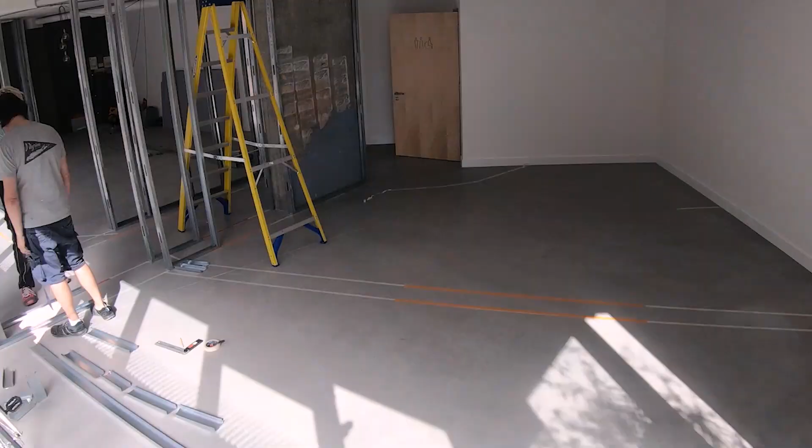How you doing? You Paul? Yes, nice to meet you, Paul. Claudio, nice to meet you. What's your name again? Scott. Welcome in, I'm gonna show you what I'm doing here.

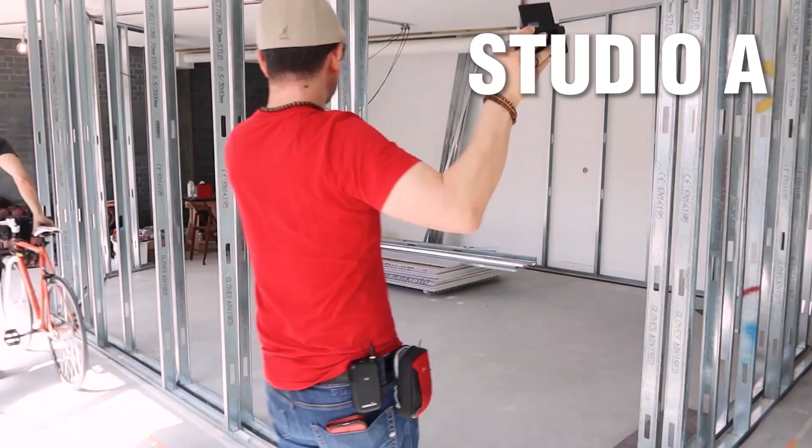This is my main room, where I'm gonna put all the synthesizers and all the production. Double walls, insulation material in here, then a 3 centimeter gap and more insulation here. And I'm also using this rubber in order to have it somewhat isolated. We're also doing the same on the top ceiling.

For the back, for now we've just planned to do one wall. This is the separation wall to the other unit, which has sound block. This would be enough, possibly? Well, it depends on how many layers of plasterboard you're putting in there, what sort of absorption you're putting in.

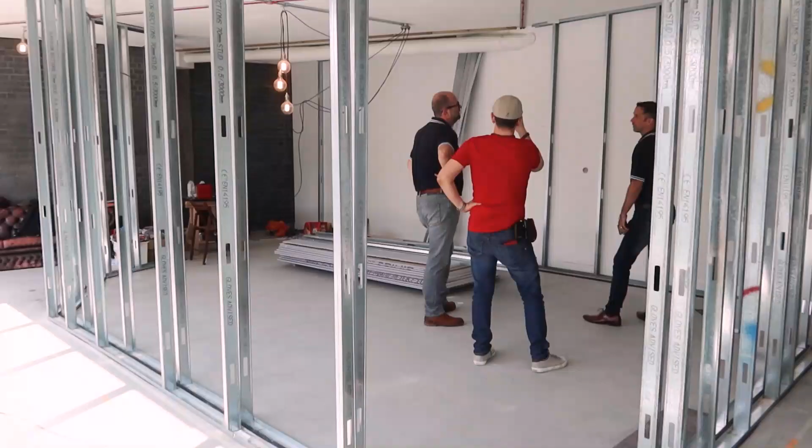What would you suggest that I use here? Some kind of mineral wool, some kind of rock wool. It depends what sort of noise level you're generating here and what people next door are expecting. Yeah, I'm trying just to be as quiet as possible for them. I don't want to disturb them, but mainly, I don't want to be disturbed.

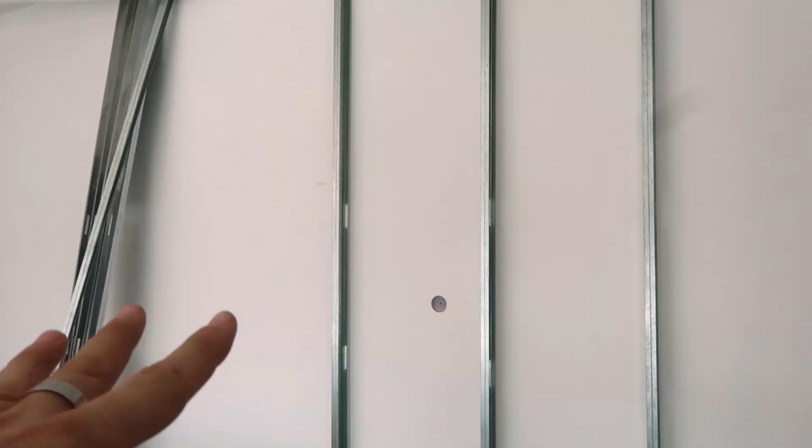Would you suggest that I should put double walls there? You would? Because you can't put it in afterwards. Alright, so then sound block, two of them? That would do? I think if you put resilient plasterboard bars or resilient fixings or something. Resilient fixings, yeah.

That floor slab will go into your neighbours, so they'll be sitting on the same floor slab as you. So what is a reasonable way to have a floating floor? Maybe some rubber? We have a panel that sits on anti-vibration mounts. But in this instance, it will make it too high, then your ceiling comes down. You can get rubber and timber floors that are quite shallow, maybe 50, 60 mil, something like that. So the whole floor is then isolated off this slab, which I think you should look at doing.

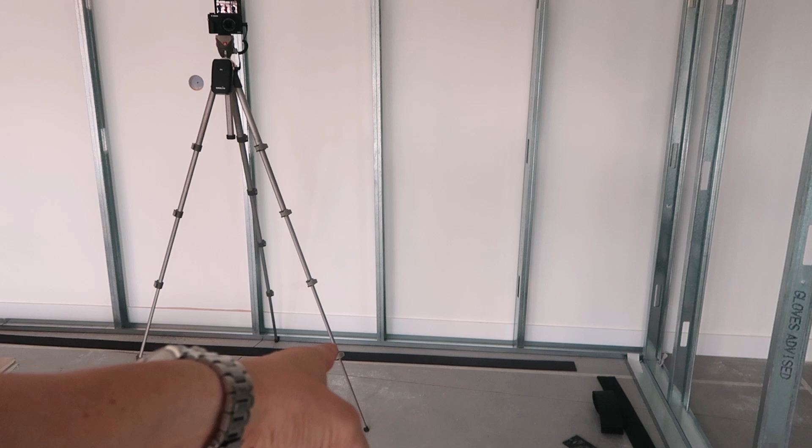So neoprene, of what thickness? 10 mil, something like that. Slightly thicker than that 5 mil one. So rubber and then floorboard. I think you want it quite thick so it's not too flexible, and you might have to build it up, so it might be a few layers of ply on top of your rubber.

When you say ply, like this one? Yeah, something very stiff. We've made up floors for audiology rooms with rubber, ply, different materials. Rubber, ply and flooring, basically. Sometimes steel plates in there. That would be expensive, right? Don't think it'd be expensive. But doesn't metal transmit the sound even more? No, as long as you isolate it, no.

It's good for mass damping. So yeah, it's good to stop. Because you stop sound with mass, correct? Correct, low frequency sound particularly, yeah. But yeah, you don't want to be in here doing something and vibrations transmitting out through your floors.

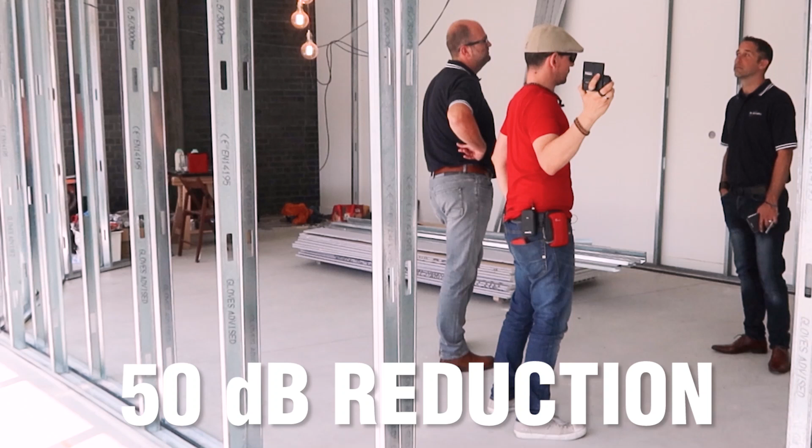And for the ceiling, I mean that's a concrete slab, isn't it? It's going to be 150, 200 mil thick, and I think you get around about 50 dB reduction through something like that. You've already got a good concrete slab. You're not going to add a great deal of noise reduction, because in order to increase your noise reduction, you need to double the mass. So you're never going to double the mass of a concrete ceiling by introducing timber and all sorts of other things. You need to create some absorption in the void between your finished ceiling and your concrete slab.

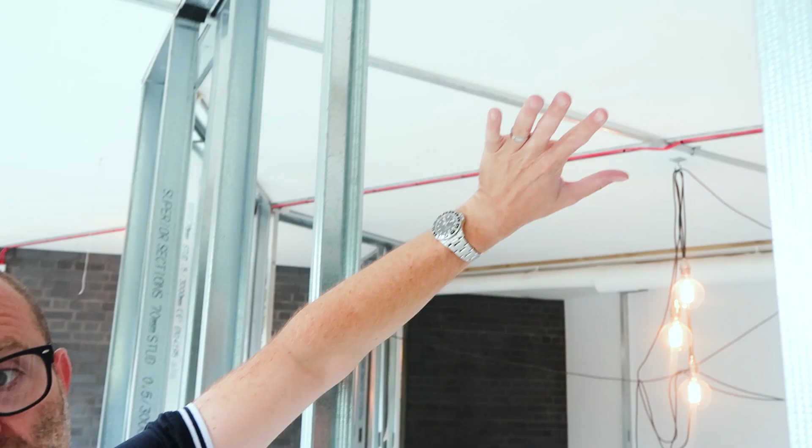So again, you might want to put rock wool or something similar up there. So rock wool and plasterboard. And in order to hang it, I need some kind of isolation. Yeah, again, resilient type hangers up there. Get some absorption up there, get a little bit of noise reduction, plasterboard or something similar. But you're not going to add a great deal to what you're already getting in terms of noise reduction through that, because there's a big slab of concrete.

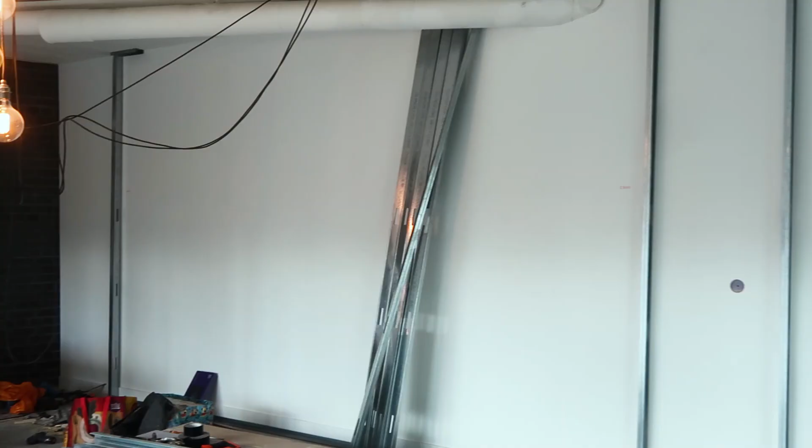Big slab there, yeah. Quite a big area to cover here, so yeah, it could end up being a bit expensive. Yeah, I know.

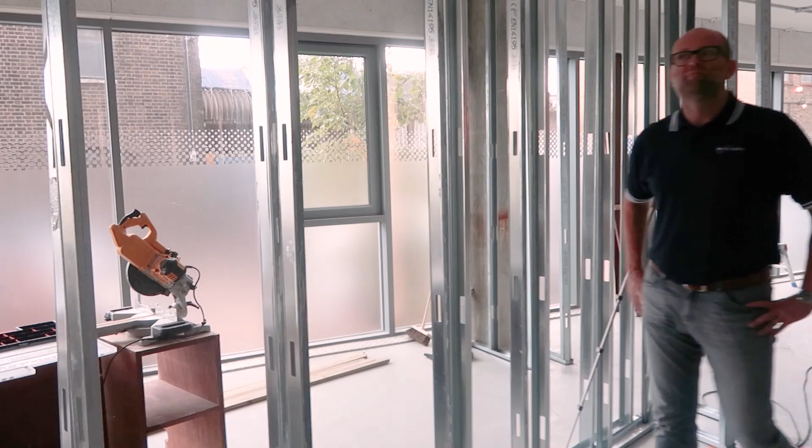Then this will be the mixing room with slanted walls so that the sound doesn't bounce too much. Yeah, you don't want any standing waves or any bouncing back and forth. Oh yeah, good. What's in there? Just a toilet? Yeah, that's a toilet, but this is another business unit.

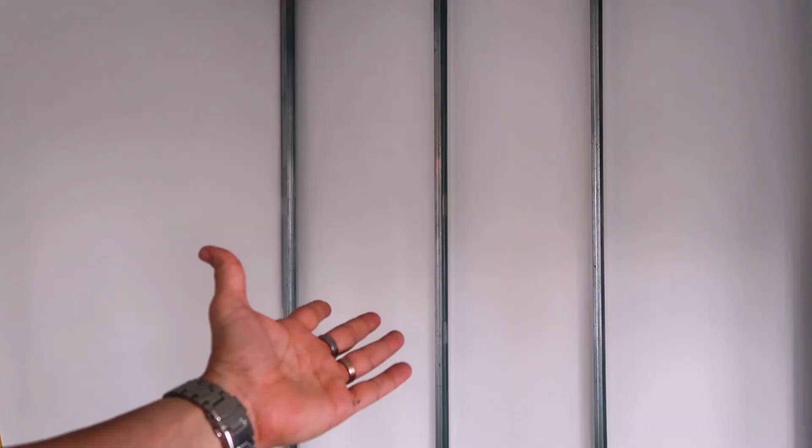Yeah, I think you need to protect yourself because you don't want to upset your neighbours. So double walls even here? Definitely, yeah? Well, if it's going into the neighbours, just protect yourself. If you don't do it, it's not good enough, and it's harder to do it afterwards. I mean, plus we're talking about like 10 centimeters more, may as well do it, right? Yeah, just so less risk of having a neighbour complain.

I don't want anyone to complain ever again. You have to understand I spent my whole life being told, Claudio, turn it down! This is the one time where I can make that disappear.

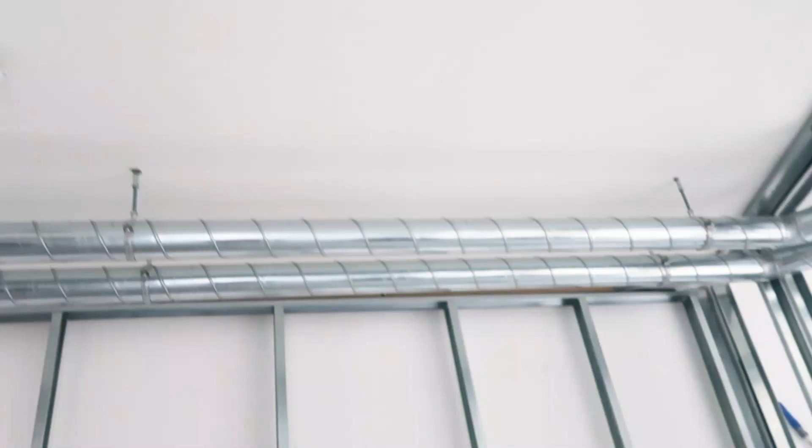What are these? These are ventilation for my bathroom. I don't know how it's gonna work because in the end I'm having ducts for the air conditioning, but I'm trying to save as much room as possible for the ceiling. Lastly, this room, I won't be able to insulate too much because I've got this. The sound is gonna go out from this. There's nothing I can do about it.

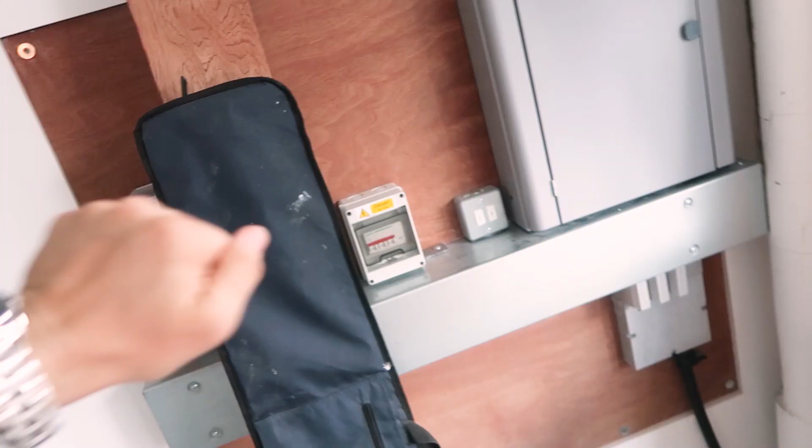In this corner, a door here, because of course I want to be able to operate the power, the servers, all the noisy bits, separated, are they giving silent? Are they giving you a noise level inside? Are they saying to you we're going to deliver the air at a certain... What I know is that if you use soundproof conduits, the ones that have like that rock wool inside of it, it's super quiet.

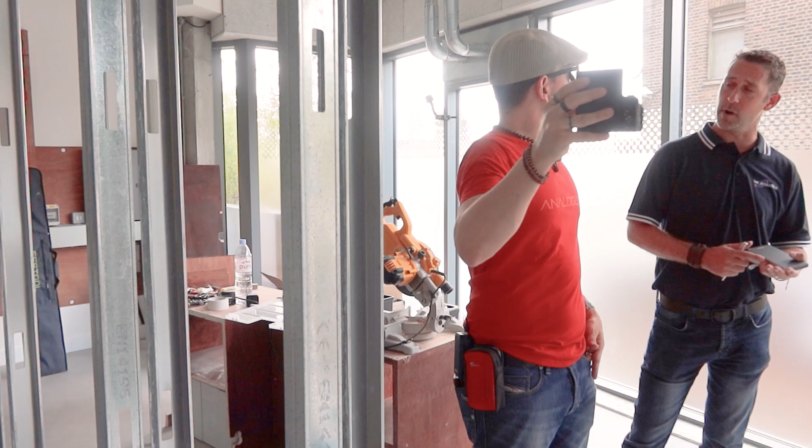Tell me about doors. We're going to offer you the latest model, which has just been through a fire test achieving 90 minutes integrity and 60 minutes insulation. Insulation wasn't critical in the UK before, it's more of a European thing. But since legislation in November, to provide an external fire-rated door it has to be tested to EN 1634, which the majority of doors produced in the UK don't have to meet—it was BS standard before. So we've developed a brand new door to take that part of the market and also upgrade our existing door, which is a 40-50 year old design that works brilliantly, but it doesn't mean we can't evolve it even more.

So are you saying I'm going to get your latest model of doors for my studio? You will get the very first doors that we produce.

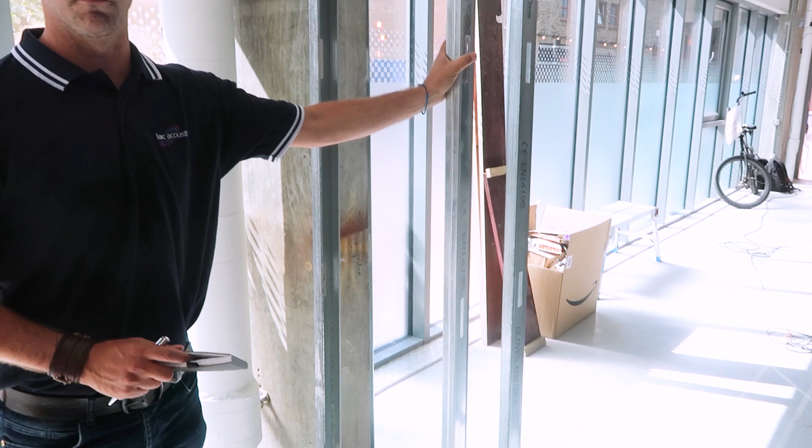These are quite heavy doors, about 200 kg each, which is why it's important to support them correctly. Is this going to be enough or not? No, for these doors and any high acoustic steel doors around that weight, you need a nice bit of timber construction—a rugby goalpost, H-frame construction, probably 100mm thick to be safe. We need to do it to the size they were detailed to for fire and acoustic purposes, which is why we're having this conversation now before I make these walls permanent.

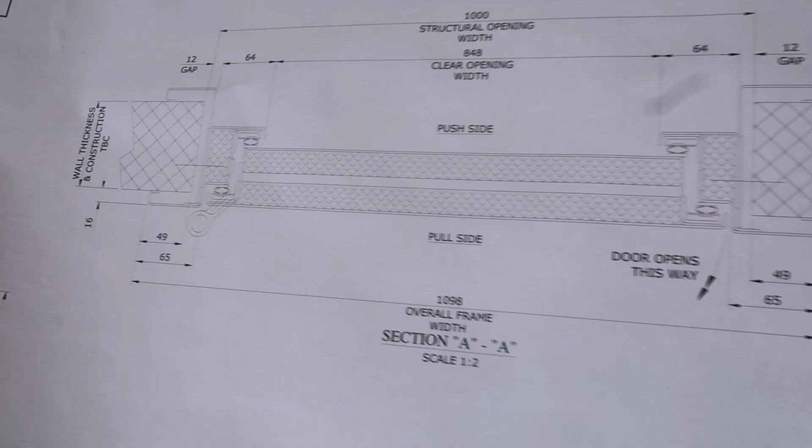So it's going to look very similar to this—you'll have your vision panel, the lock more centralised, the vision panel, and the closer to make sure it closes behind you and latches, which we have to have on the fire rated door as well. But these hinges are disappearing—we're now going to concealed hinges. It's not something anyone else, as far as we know, does on a door of our performance. Concealed hinges so you won't see them, and it'll work just as well. Drop down seals, and we'll still keep the two mag seals in that door—that will remain the same.

And what is the finish on these doors? Polyester powder coated, so it can be any colour you need it to be—entirely up to you. I'm undecided, but I like combinations of red, wood and white, I think that should be the theme. We could do the frame one colour and the leaf another, if you like whites and reds, or the whole thing red, either way, it's not a problem. So, red doors—something for you to think about.

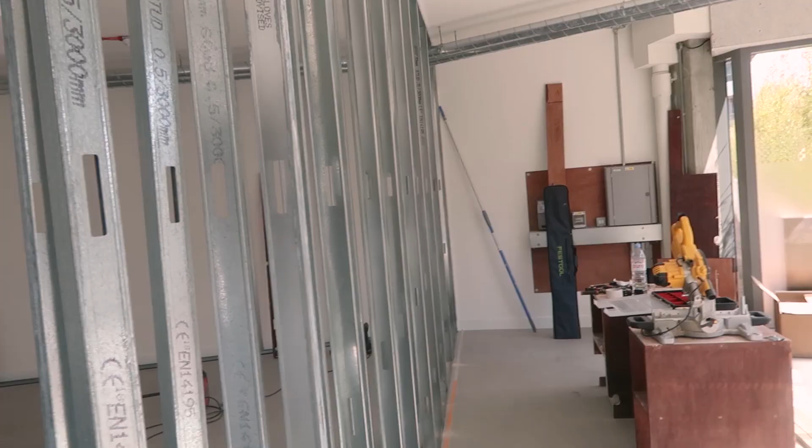So basically, one door would be here, one there, one there, and one in the back for the noise room. But that one won't have a vision panel because... No, I don't need it. No, exactly. This is so exciting!

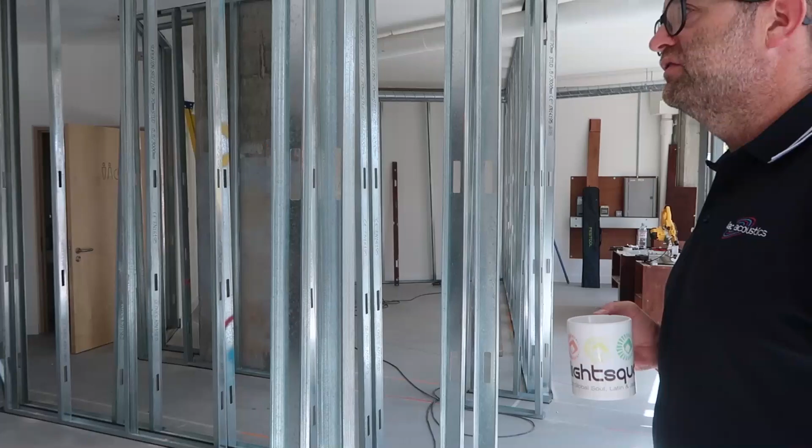I'm thinking of making some nice big windows here, another window between the two studios so we can see through, and also it makes the place look bigger. Yeah, so it's going to be minimum 200, say 250, 260—a very good wall in terms of noise reduction. So you want to match that window? Yeah, and what do I have to do in order to match the window?

Acoustics are based on the air gap between the two panes of glass and the thickness of glass. If you've got a wider wall, you don't need as thick glass, but if you've got a thinner wall, you need thicker glass to work the same way. I'll go away and look at our calculator and the thickness of the wall, and what thickness of glass we'll need to create a window with a performance of probably 55, 60 dB. Would you say two windows or one big window?

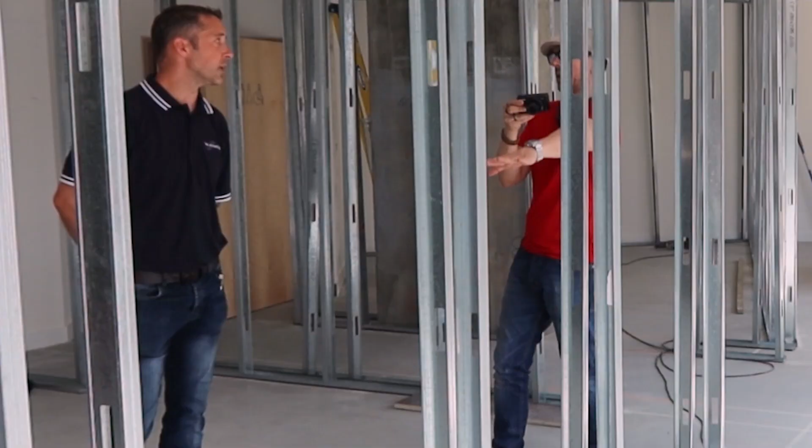What would you suggest? Aesthetically, I think one biggish window would look better than a couple of windows. That means a stronger structure in here to sustain it—your builders will need to put in something that's going to take it. If we do, say 2 metres by a metre, I don't think we'll need to go too thick on the glass either to achieve that.

10.8 maybe is the thickest to get the performance you should have in a room like this. I'll give you all the information and look at the design. Dean is coming right back.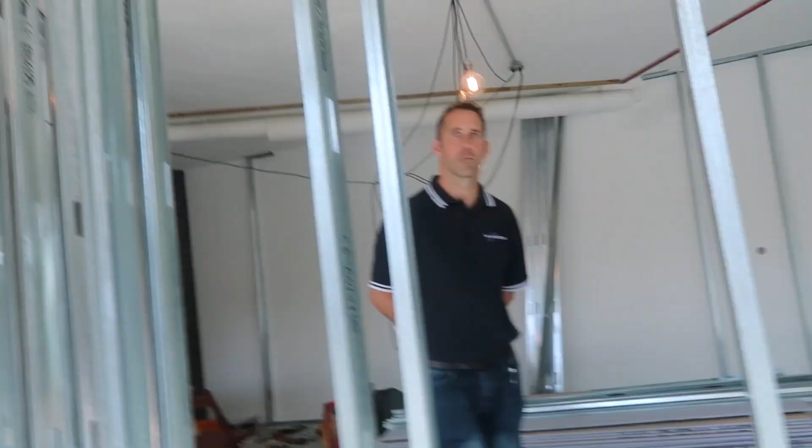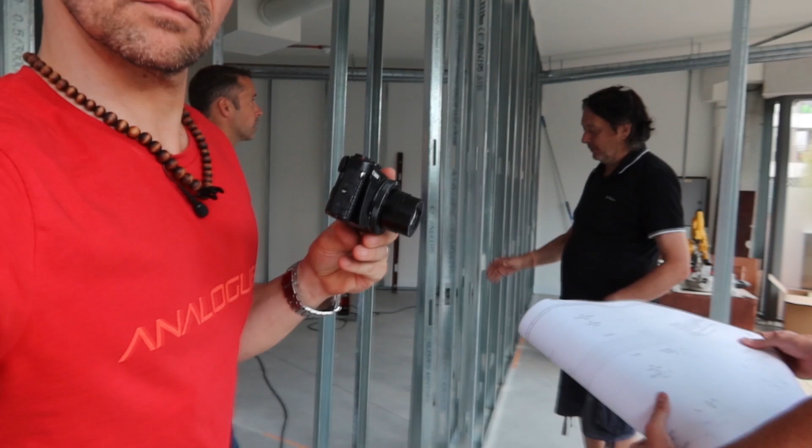There's the man. We've been doing some planning here—the doors are about 200 kilos, so we'll have to build about 100 mil posts on the H frame structure, that'll give us the weight and take it. Both doors will hang off that central pillar, so when you open the door you want to go in there. So what I'll do is build something here—right, okay, a big nice structure.